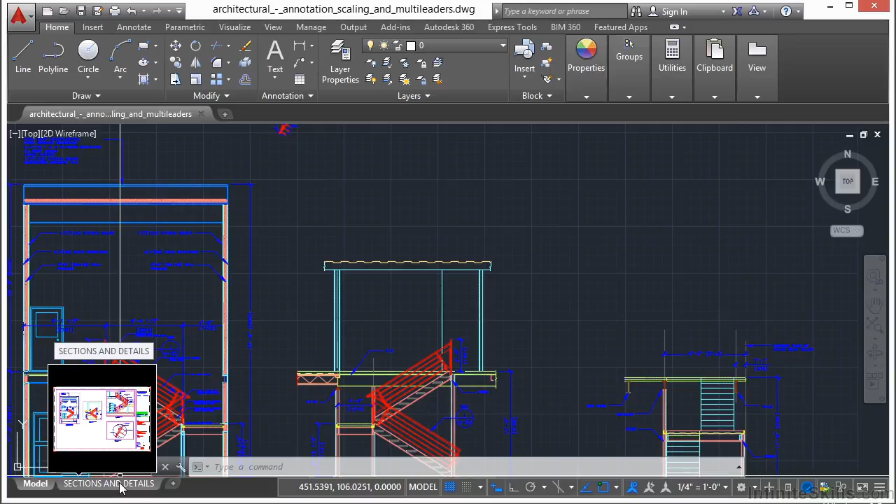So to start, we're going to make a new layout tab. To do that, just right-click on the layout tabs and click New Layout. That will create a tab called Layout 1. Page name is fine for right now. So let's activate that tab by clicking on it. Just go to it. And we have a viewport already set up.

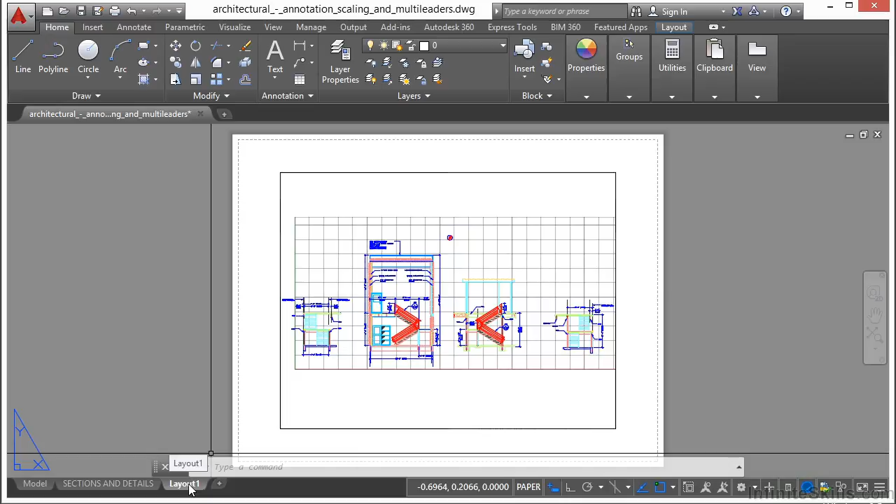Now let's go to the Page Setup Manager. It's real easy to get to. Just go down to your Layout tab and right-click on it and go to Page Setup Manager. Now this window allows you to either pick a page setup already in the drawing or make a new one. Any names that you see down here with asterisks on it, as we have here layout and sections and details, are Paperspace tabs. Any others that you'll see can actually be assigned to it.

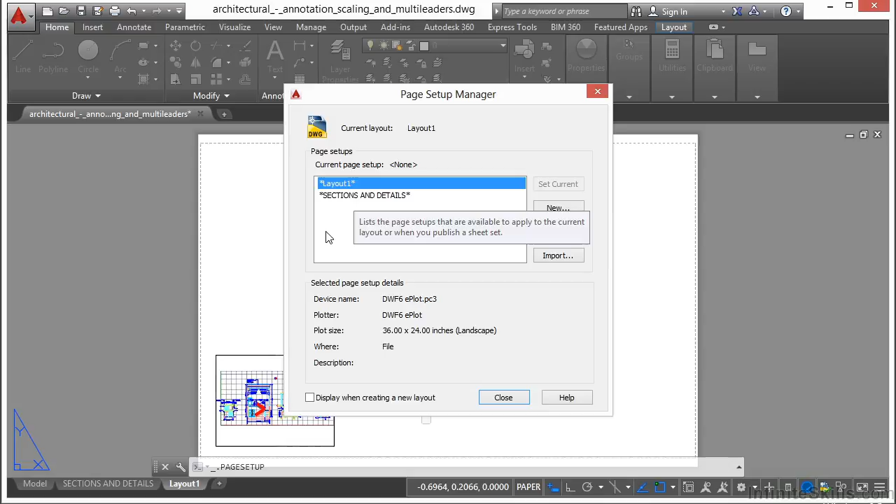Right now we don't have any page setups in here. So in order to use our page setups, we're going to have to create a new one. So click on the New button. Let's give this a name. I'm just going to call it Page Setup Example.

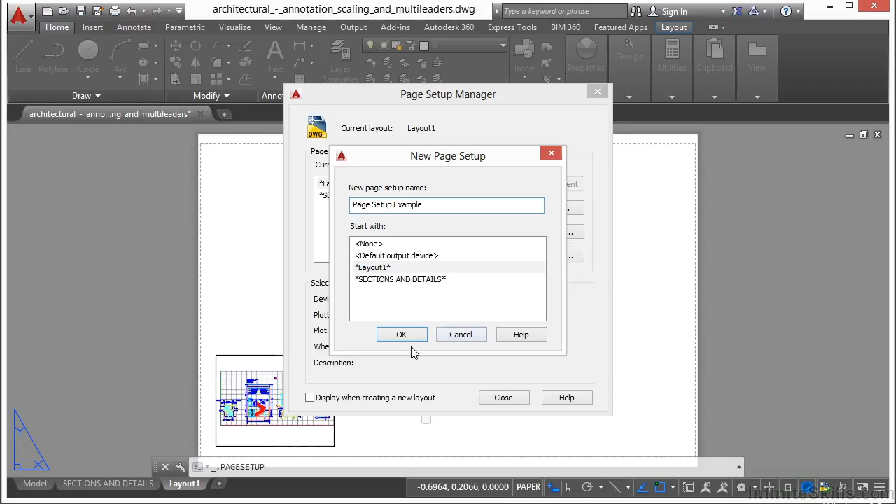Now what you want to do with the names is give it a name that defines or describes what's going on. So if you're printing a black and white 8.5 by 11, give it a name similar to that. Keep them short, but make sure they're clear and well defined so that anyone using them knows and understands exactly what it is you're trying to do with that page setup. So give it a name, click OK.

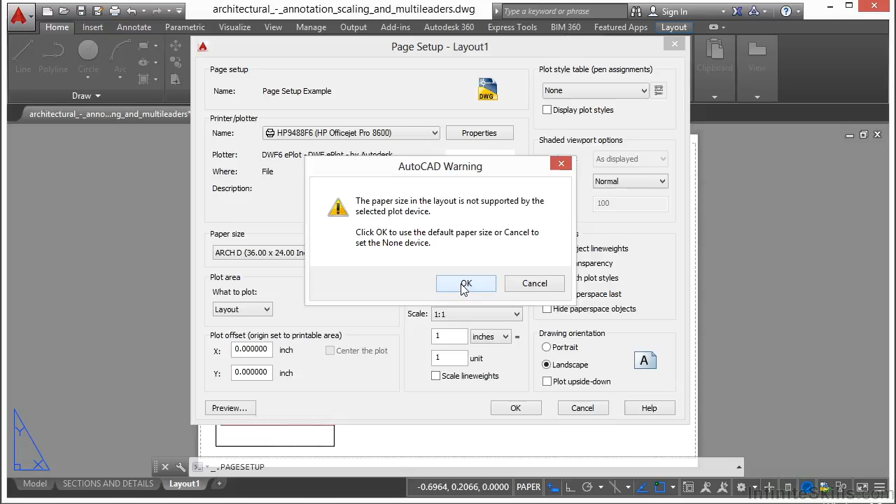Now we just go through all of the settings, just like we would when we were normally printing. So I'm going to pick my printer first. Since I only have one real printer to choose from, I'm going to pick it. And this gives me a warning. It says my page size is too big, and I realize that. I'm clicking OK, and it gives a description of what's going on here. Now I'm going to pick letter size for my paper size, and I want to pick extents. I want it to center the plot, and I want it to fit to the page.

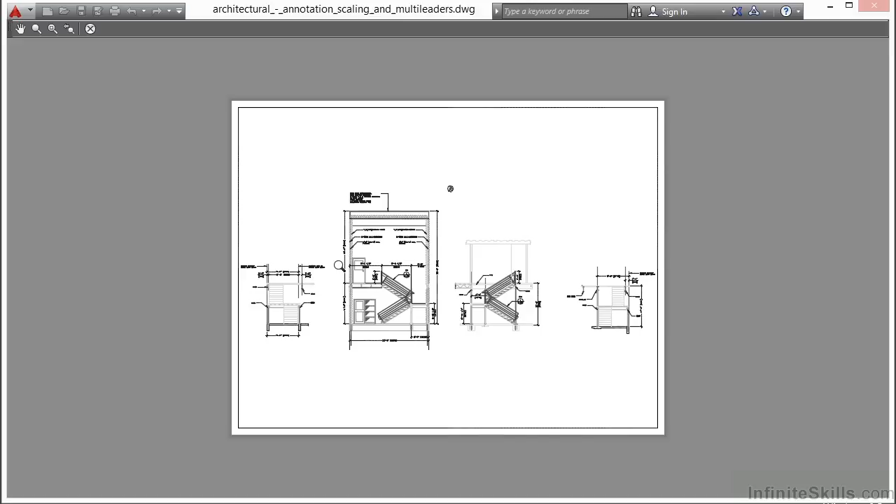When you're ready, click on this preview, and the preview button will show you exactly what it's going to look like. See, that fits everything into an 8.5 by 11 size sheet. Works perfectly for me. Now I can zoom in and out with my scroll wheel. I can also pan with my scroll wheel. Or if I right click, I can get to pan and zoom, or zoom window, or zoom original. Or when I'm finished, I just click exit.

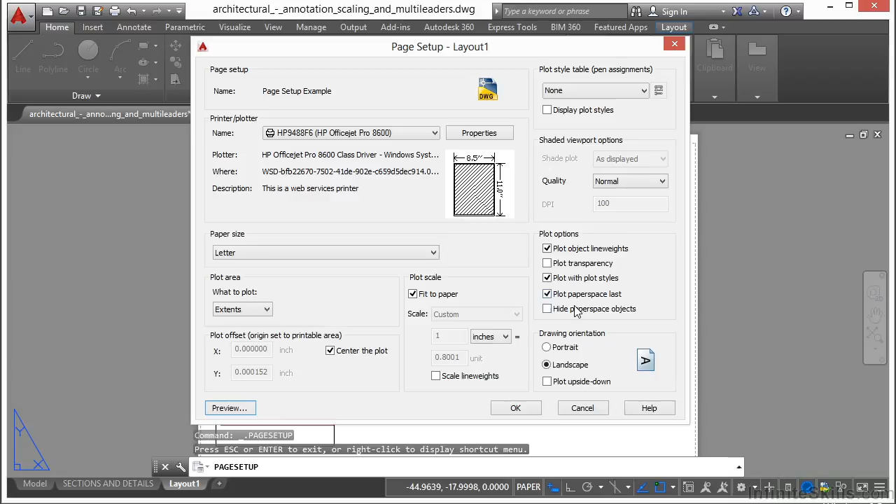Now when everything else is okay, make sure my portrait and landscape is set up. I'm not going to use a CTB file. Everything else here looks good. I'm going to click OK. And now my page setup has been created, and now I can apply it to this Paperspace tab.

So what I do is I select it, and I hit the Set Current button. Now when you do that, you'll see here it says Layout 1, and in parentheses it has the name of the page setup. That means it's been assigned to this Paperspace tab. This Paperspace tab does not have a page setup at all. That's okay. I'm going to create one more, so I'm going to select New.

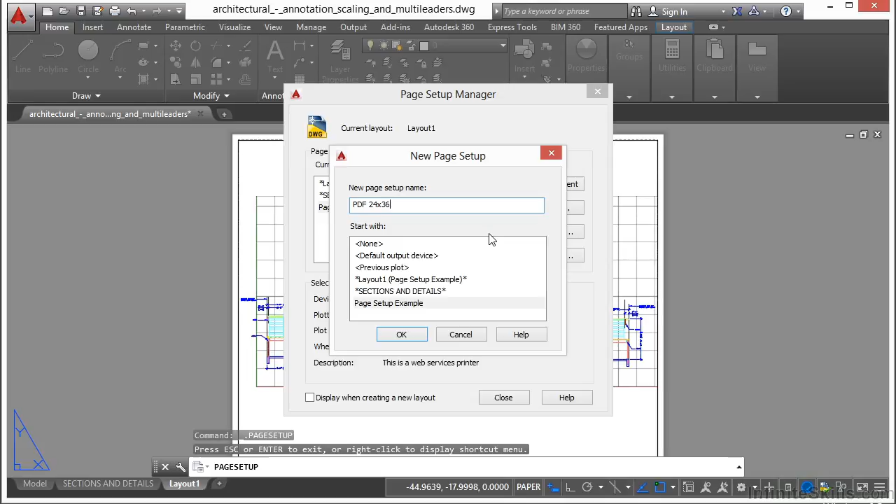Now you notice that I selected this page setup before I clicked New. This works just like it does in any of the other style creations, dimensions, text, etc. It will copy these settings, and then I'll just be able to tweak it however I want. Well, I'm going to call this PDF 24 by 36 because that's what I'm going to create. With this page setup, my drawings will be printed not to paper, but to a PDF file. And it will be full size, 24 by 36. So I'm going to click OK.

AutoCAD, by default and out of the box, comes with several settings. I have some programs that I use, like Snagit, OneNote, and Nitro PDF Creator, that will allow me to print to those file types. Also, you have a Microsoft XPS document writer. You should have that if you're running Windows, which you should be. If you have a fax printer set up, or your default Windows printer, you can print to those types of

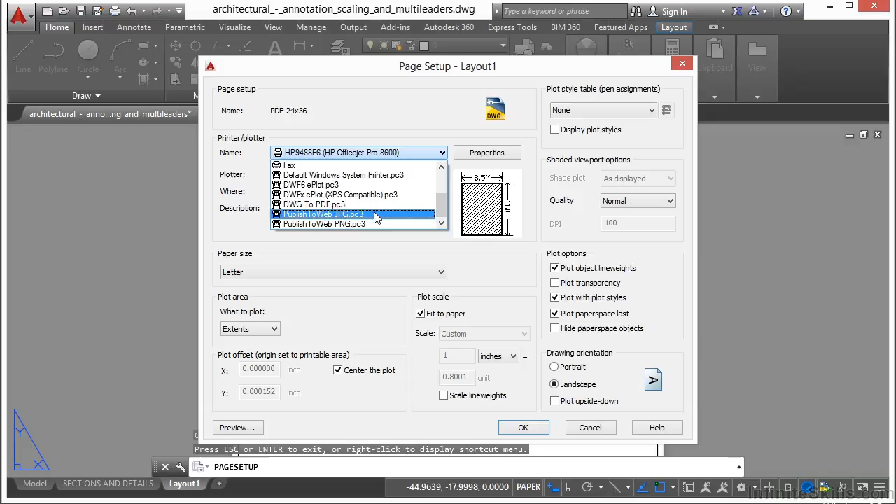files. AutoCAD itself comes with settings to print to a DWF file, a DWFX, a PDF, a JPEG, or a PNG file. And those are these options here. So instead of sending the document to a piece of paper, it sends it to one of these electronic file types. So this is a great way to share your drawings via email. Well, I'm going to use the DWG to PDF file.

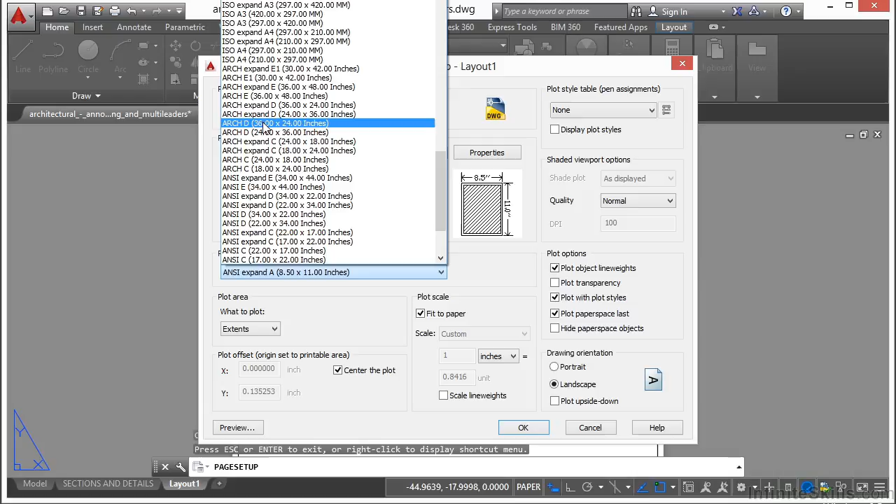I have a lot of options here available to me. Now, this is an architectural D size drawing, a 36 by 24 size sheet. Now, you see I have two options here, 36 by 24 and then 24 by 36. Well, this drawing is a 36 by 24 in reality. It's 36 wide, 24 tall. And the first number in your AutoCAD printing is what's going to be the width. So that's what I'm going to pick, 36 by 24.

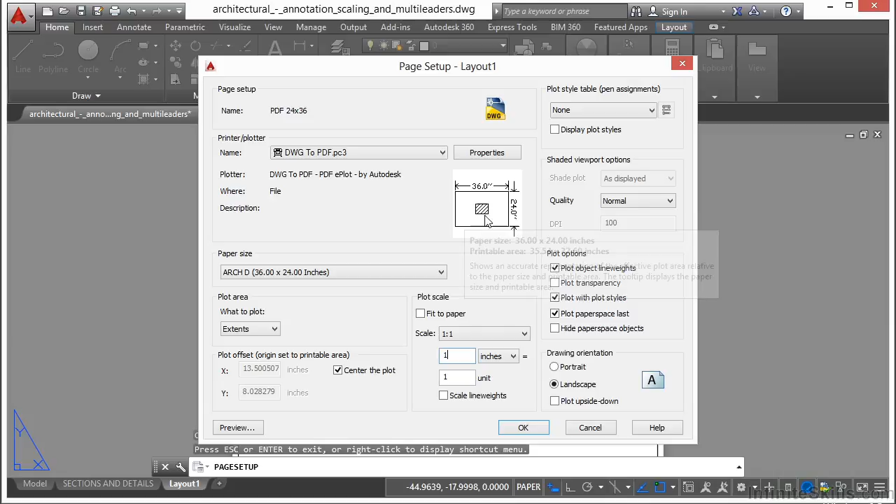Now I'm still set as the drawing to extents, and this is set to center. This is set to fit to paper. I'm going to turn that off, change my units to 1. And you can see here, this drawing is not really set up to be printed to that size. And you're going to find out that this happens to you quite often, where you think it's set up to be a certain way, but it really isn't. If I hit preview, you can see how small that is.

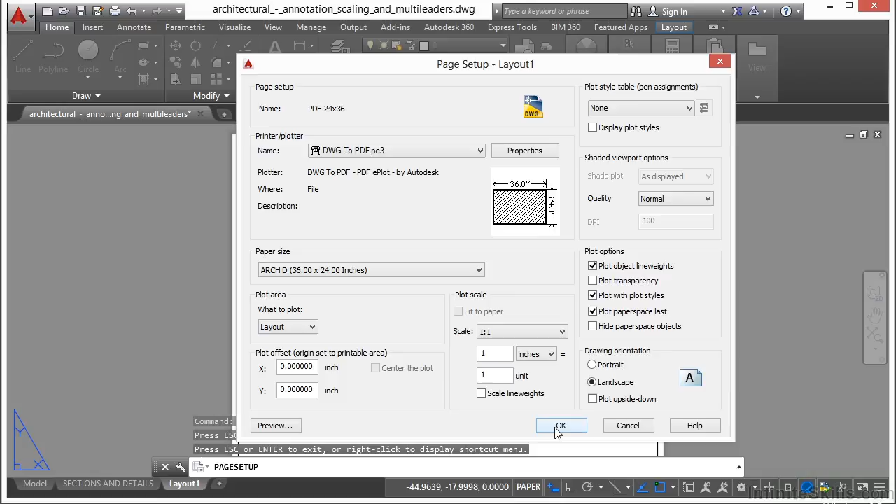What's happening here is that this Paperspace tab is set up to be 8.5 by 11. And that's okay, because I'm not going to apply it to this Paperspace tab. I'm going to apply it to this other one. So I am going to set up to layout 1:1. Now it's going to be 24 by 36 when I use this setting. I'm going to click OK. And now it's here as an option available to me. I'm going to click close.

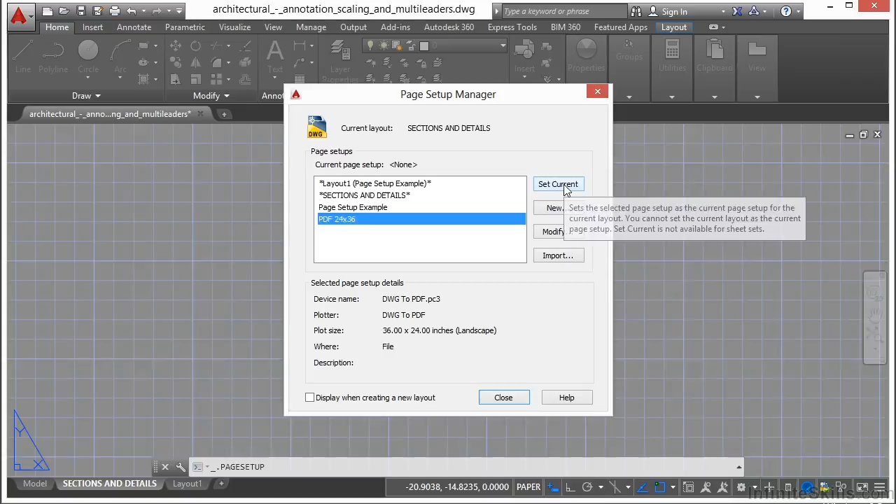I'm going to go to this Paperspace tab. I'm going to right click on it and go to my Page Setup Manager. And for this Paperspace tab, I'm going to select my PDF 24 by 36, pick Set Current, and click Close. Remember I talked about that dashed line? Here it is right there. That's the dashed line. So I'm going to have to reposition my viewport and my other drawing objects here to make sure it fits inside my sheet.

So I'm using the Move command, selecting everything. Now they have these little guidelines here in this drawing, so I'm going to try to use that. You can see the white paper is right here. That also gives me a guide as to my paper size. Now you can't snap to any of those points, so you just got to kind of eyeball it. And once you do that, let's look over here, and we see that it seems to be fitting into everything, and we're good. Now we can save the file, and we can go on from there.

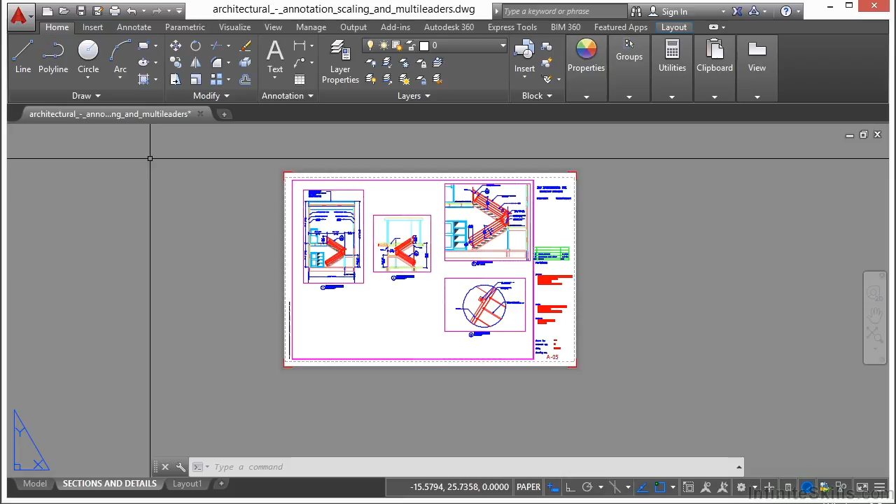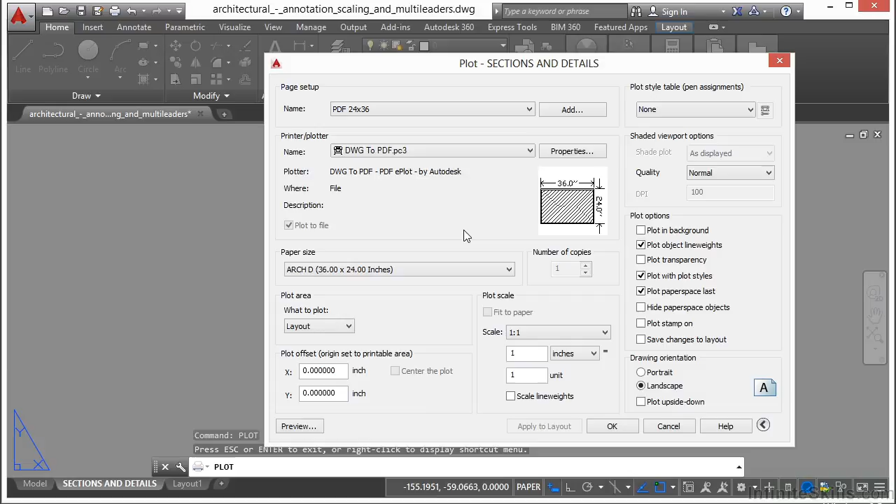Because now when I want to print, let's go to Print. I find my page setups. I select it. I hit my preview, see that it works. Right click, exit, and then click OK. I don't have to go through any of these settings. They all come up automatically for me, and I know they're correct. So it saves time and it makes sure you print correctly every time.